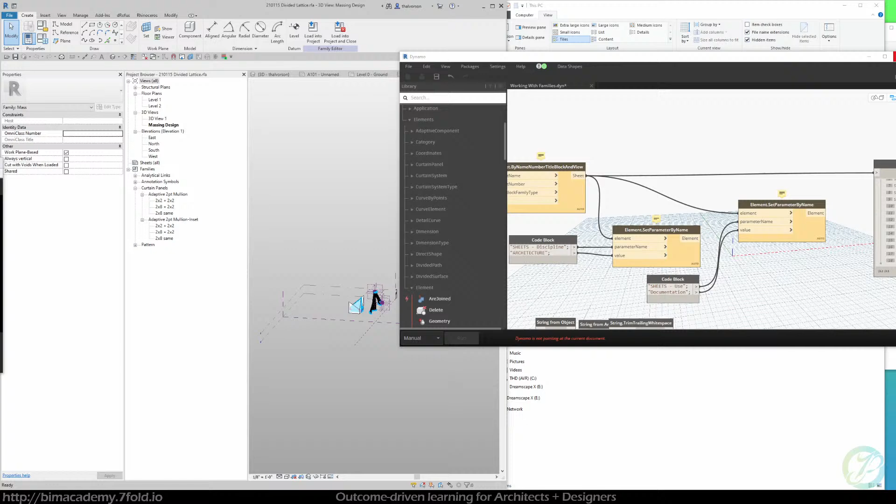Let me close Dynamo for a second and just focus on the Revit environment. So what do we got here?

I have a new massing environment family, and if you haven't done this already, it's just under File, New, Family right here. Let me just pull up the chat window so I'm not missing anybody here.

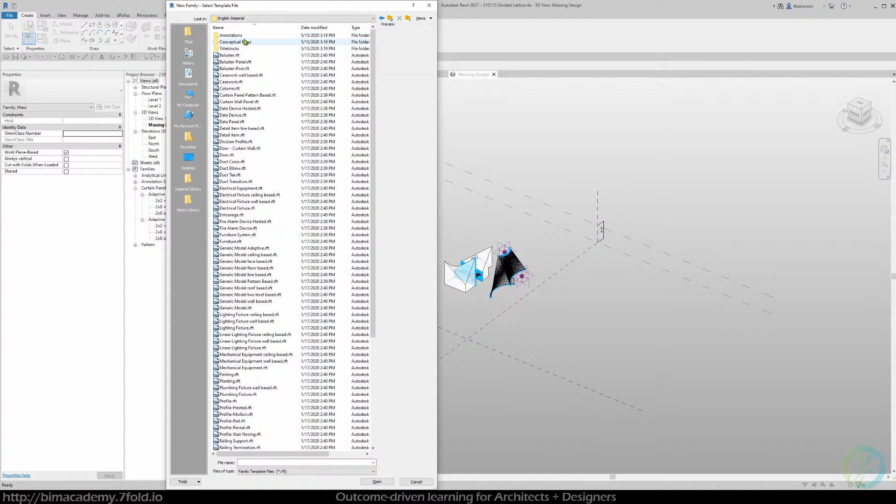So if you haven't already done this, go ahead and go to File, New, Conceptual Mass or Family, and then navigate to your template. I'm going to sort by name, go to Conceptual Mass, and mass.rft, and hit open. That'll give you the environment that we're looking at here.

Just to give you a quick overview of what we're going to cover: basically I have a couple points here that are driving these repeater components, and we actually have an adaptive 2-point component here. If we take that and drag this up or change the offset relative to the level, then that's going to adapt as you go.

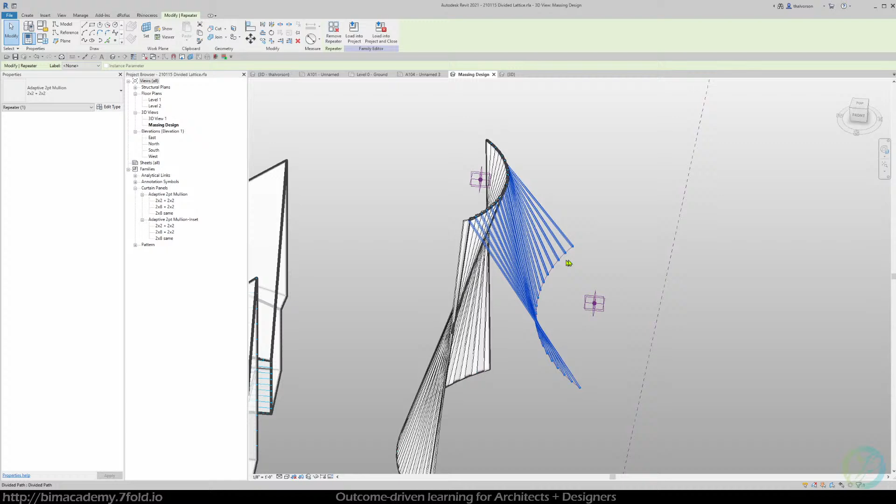So if I just Control Z to undo that - one cool thing I'll show you how to do with this adaptive component is you can change out the type. This is controlling the profile size on this side as well as the upper side there, and we can control it parametrically. Then as we move these points around, the host line here, we can adapt that dynamically, and the entire system is going to adapt with us.

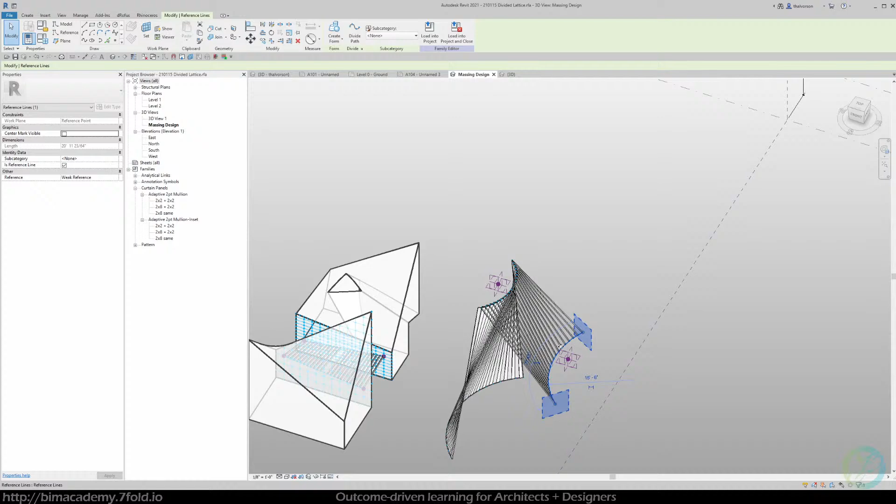So this is completely out of the box Revit. There's no Grasshopper, no Dynamo required to do this workflow. And this same component that's doing this type of framing system here, we can reuse that on a lattice type structure that is adapting to 2 different surfaces, and we can even load that into our project environment and use it there. So tons of flexibility here.

If we do have time at the end, the Dynamo workflow I mentioned, I'll basically just be showing the bread and butter of Dynamo. So if you haven't touched it before, this is the first time you're getting into it - basically how to generate views and sheets automatically if you don't have other add-ins such as Ideate software or any proprietary software you've made yourself, or pyRevit. You can use Dynamo to spin up your own tools and then automate all the data that's attached to your sheets.

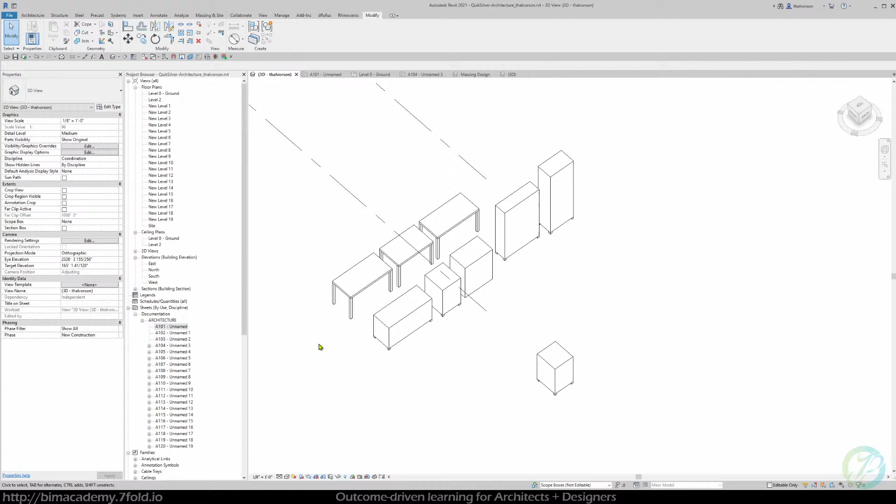So any of the additional instance parameters that you're using to help organize your set, I can show how to do that. Basically, once you get your set organized, there's a bunch of different ways. It opens up the core concepts of how to use Dynamo and making edits to families and anything in the model that you might not be seeing visually - you can see analytically through Dynamo. So we'll take a look at that.

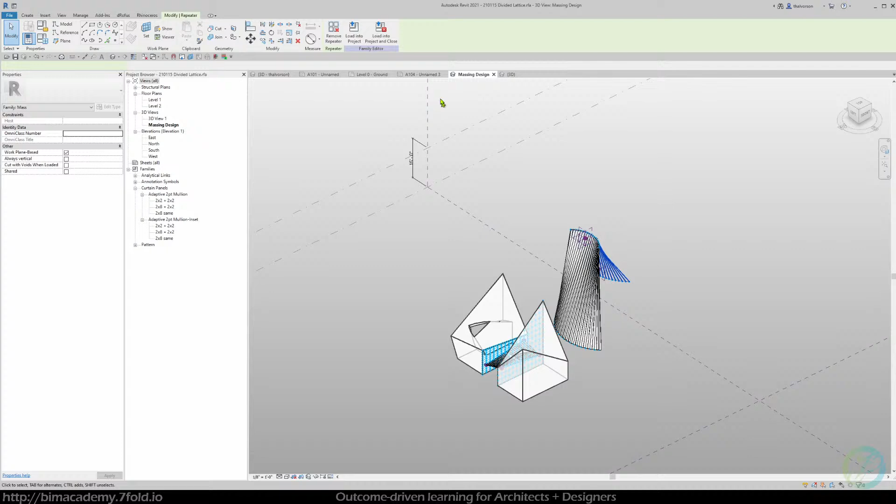But I'm going to go ahead and start with the conceptual massing workflow I talked about. And again, if I just open up that family real quick, let's tab in here, do that family, take a little bit closer look. It's just a pretty standard 2-point adaptive component, and we'll build this up from scratch if you follow along. So let's go ahead and do that.

So if you're in your new massing environment mode, you can do a bunch of different things to model. If you go to the Create tab, go to Model and Rectangle, just be mindful of these 2 things here - drawing on face. I typically always hit Draw on Work Plane, and then I'm being mindful of this green ribbon that's opened up here. I'm just going to keep it on Level 1, but I could pick any different surface I want - I'm going to keep it at Level 1 here.

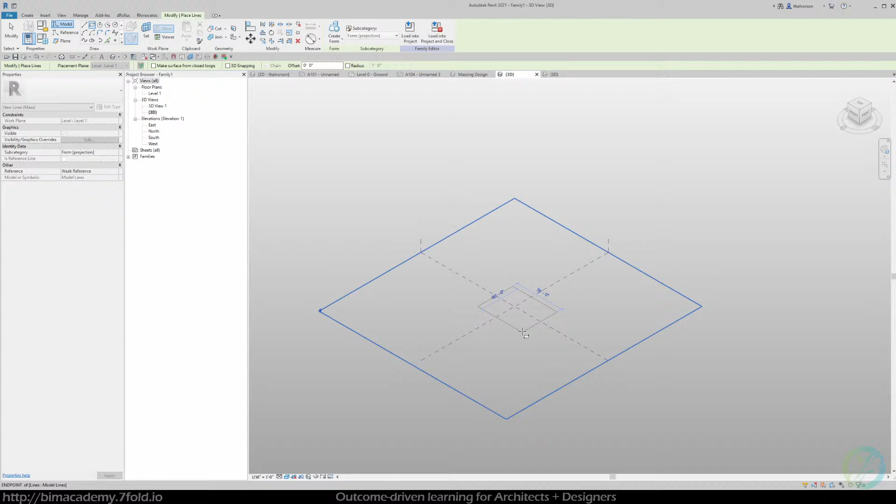And then just draw that shape. Now I can start to size this if I want, but I'm just going to keep it simple and hit Create Form. I'm going to extrude that line. Then I have access to all the edges, the points, anything in here that I want, so I can select those points and start to manipulate them.

Now, if you wanted to start to sculpt things a bit more, you could - there's a bunch of different ways to do it, but I typically will do different shapes with like a reference and set those reference planes.

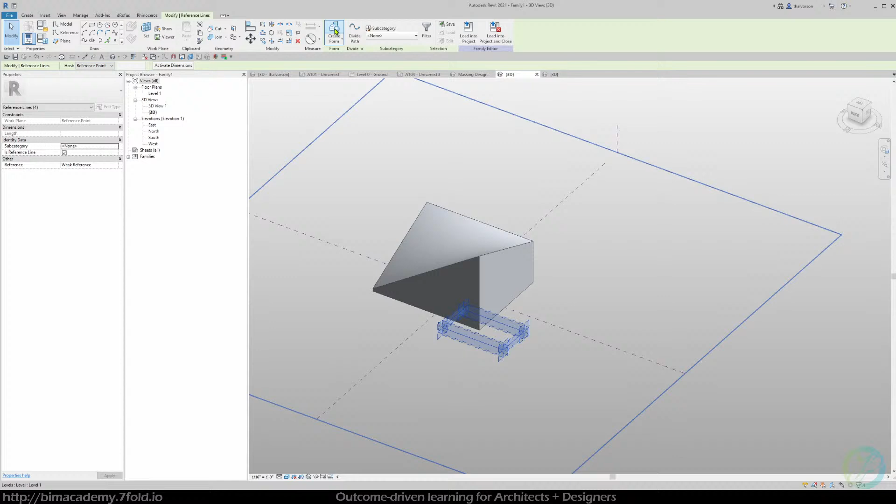And then when I create form at this point, now I have the option to do a surface or an extrusion. And the reason I did that is because if I turn this into, instead of a solid, I turn this into a void. Now it's on the wrong level, but I anticipated it to be cutting away from that.

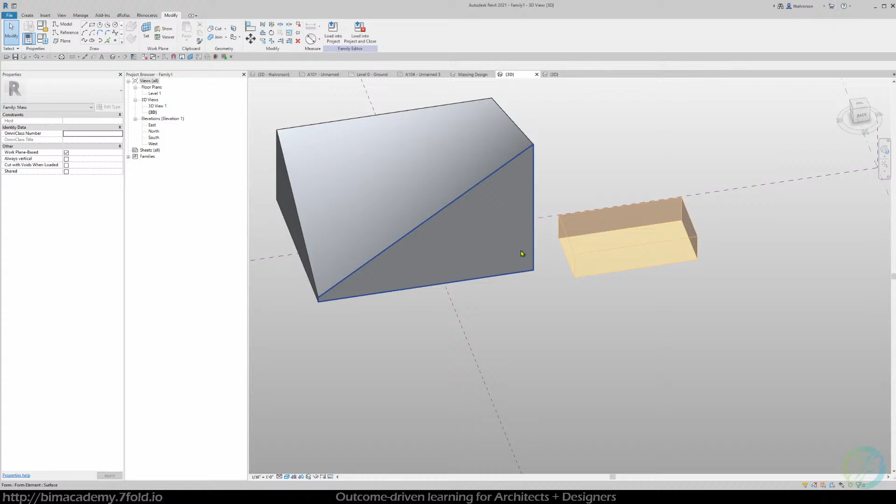So if I screwed up my hosting relationships, I can just select those reference lines. I can see right here the host is set to reference point, and I can just change that to level 1. So I just brought that down there, and now I can just drag that into position. And if it's not cutting right away, just go up here to cut and say, cut this from that. And voila, there it's booleaning away.

That's a tongue twister. And if I just tab, I can start to manipulate this extrusion without needing to tab all the way into the underlying void form. So that's kind of a nice way to visualize it.

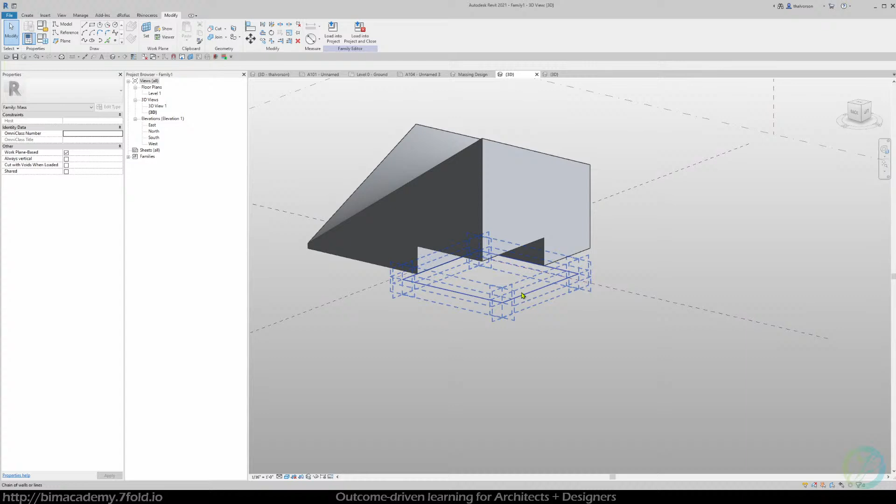You can also do 2 sets of these. So if you want to do a taper, I'm not going to go too deep on all that type of stuff, but there's a lot of good ways.

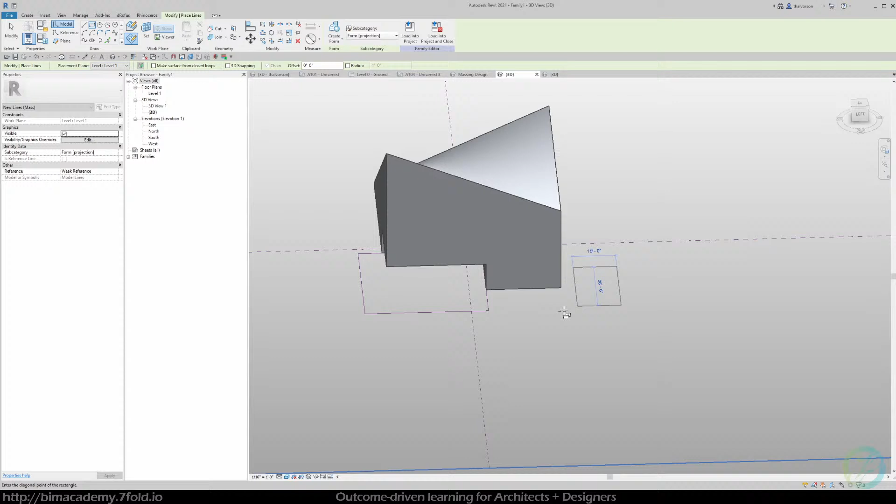If you wanted to do it more flexibly, you could do a model rectangle like we did before, and then instead of reference lines, we can set that to level 1, and then just drag that into place. And if I extrude that, that gives me that flexibility with the points and the edges.

This one, you're not going to have that point flexibility. So let me just go back to making this a little bit more translucent and tab into that point there. And I get generally what I want to do, and just tab selecting that. Now, if I get pretty close to what I want, that's okay.

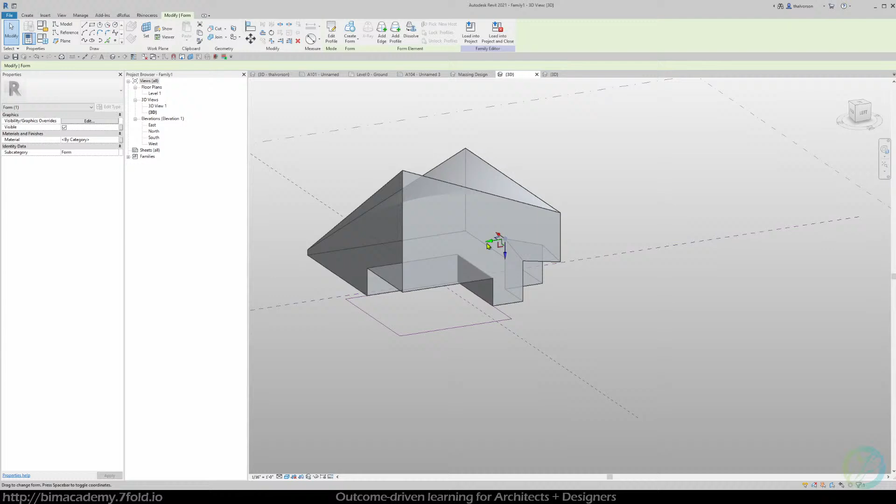And now I can just change that again to a void, and it's going to cut away from there. Now, if I need to get back to the geometry, it takes a little bit more effort to tab in, but Revit does a pretty good job of guessing what I want to do here, and I can start to manipulate the cutaway form. So feel free to explore how you want to use that.

Okay, so now that we have our form, I'm just going to, for simplicity, for this demonstration, take this and go up here to mirror, which apparently is unavailable to me. Let's see if I can do it this way. Yep, so if I have everything selected, I can just mirror, draw axis, and do it like that.

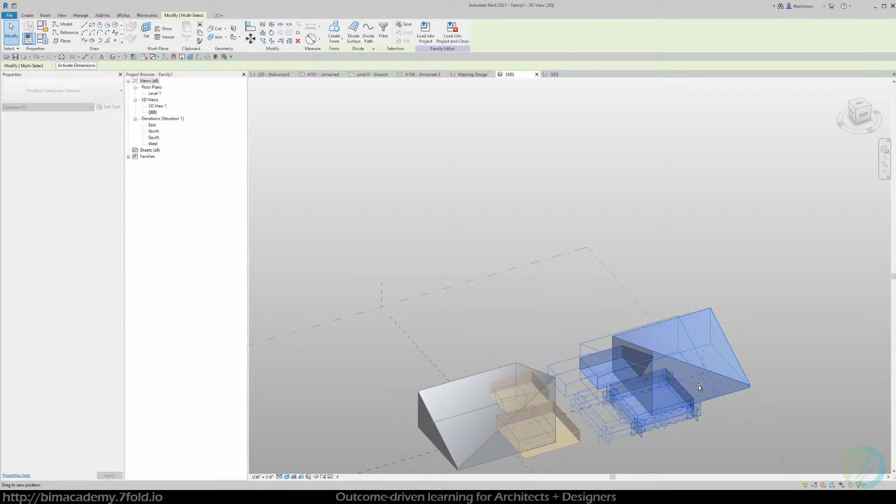Okay, and I'm just going to get these closer, and I'm setting up that workflow we had just prior. So now if I go ahead and do cut once again, I'm going to cut this void from that. Now that's back in there as I wanted. And I'm going to go ahead and just put this back to not be transparent. Yep.

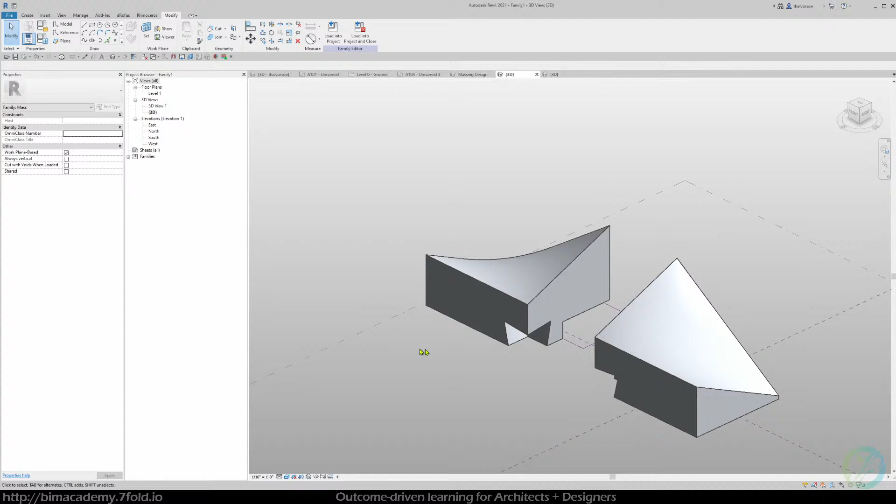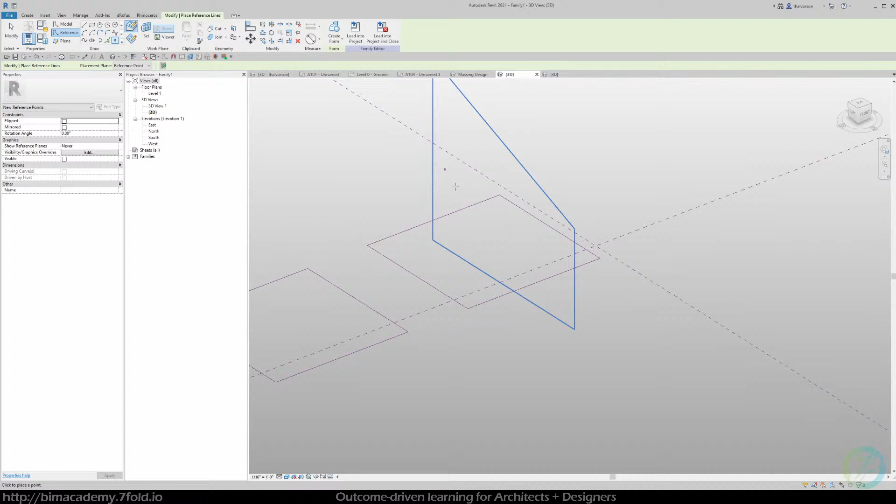All right, so we got our form. And now, if I just go up to reference point and say draw on face, I can go ahead and do that directly on this face here. I'm going to do 2 points there, as well as 2 points over here. Okay, and then select those points. And I know it's hosted properly because it's kind of partially embedded right there.

But I'm going to go ahead and control select both of those, come up here to the modify tab and just select spline through points. And the reason we do that is it allows the points to continue to persist even after we are done.

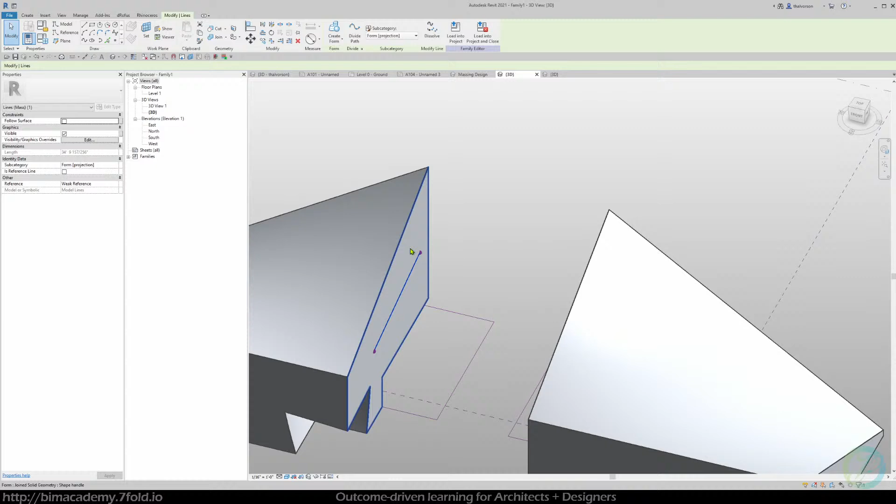Okay, so now that model line is created, I'm going to convert it to a reference line. And I know that because of the planes that are there. And there's benefits to this. We'll talk more about it in a future video.

But I'm going to repeat that process on the other side here and just do spline through points. Is a reference point there. And then if I wanted to, I could loft these together by just selecting both and saying create form. That kind of gives me a visual of what I'm anticipating to work with. But if I just undo that, doing Control Z, I'm actually going to do it a different way. I'm going to select both reference lines and say divide path.

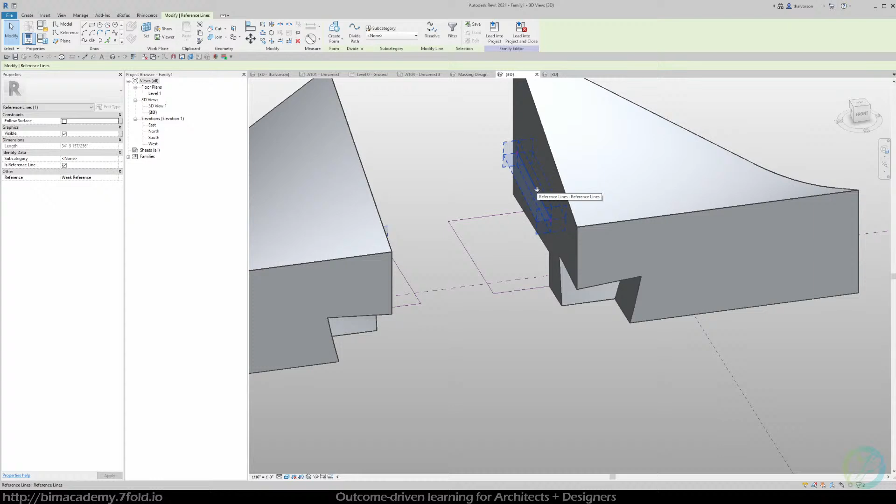Okay, now it's going to give me a bunch of options for this divided path on the side here. With both of them still selected, I'm just going to change this to a higher fixed number.

With them still selected, I'm actually going to hit this radio button to associate to a parameter. I was going to call this number of divisions.

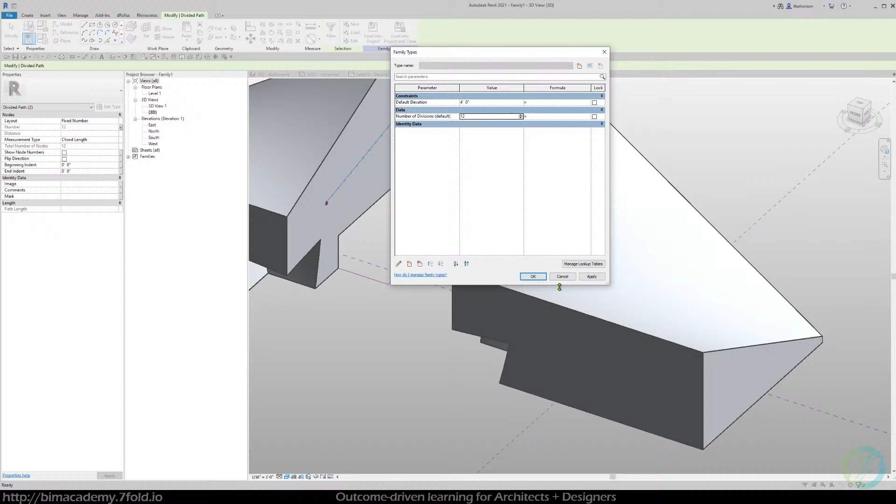So we're just going to do this as data, instance, hit OK, and hit OK. Now if I do need to edit that, it's up here in the family types dialog box, and I can just increment that here. If I loaded this into my project and I need to update that, I could do so without coming back in this environment.

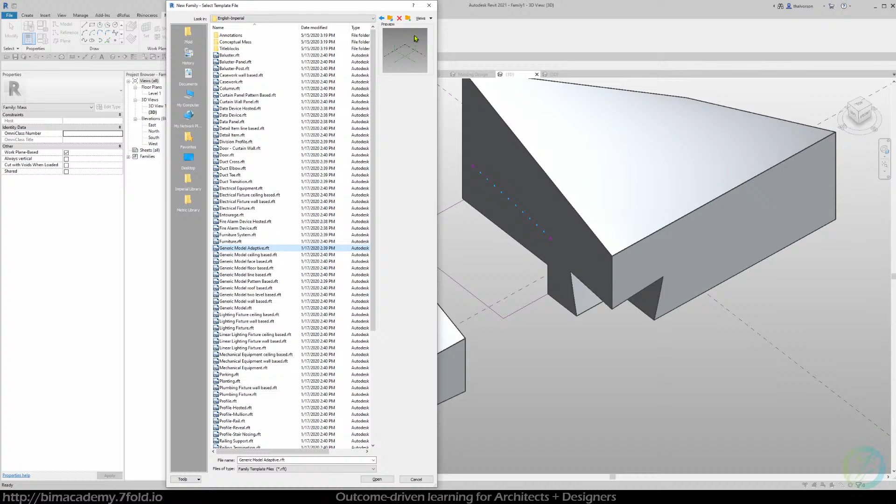For now, we're going to leave that as is. Next, let's go ahead and do File, New, Family. This is going to set up our adaptive component. I'm going to go to my Imperial and come down here to Generic Model Adaptive. This is a completely different environment than any of these other ones.

Just be mindful, it's got that similar gray background, special type of environment just for adaptive components. We're going to pop that open and it looks similar, but there's a lot more relative information like reference level and things along that line. But all we need to do to start is just go to reference point, making sure I'm picking that on the work plane being the reference level, and I can just drop two points on.

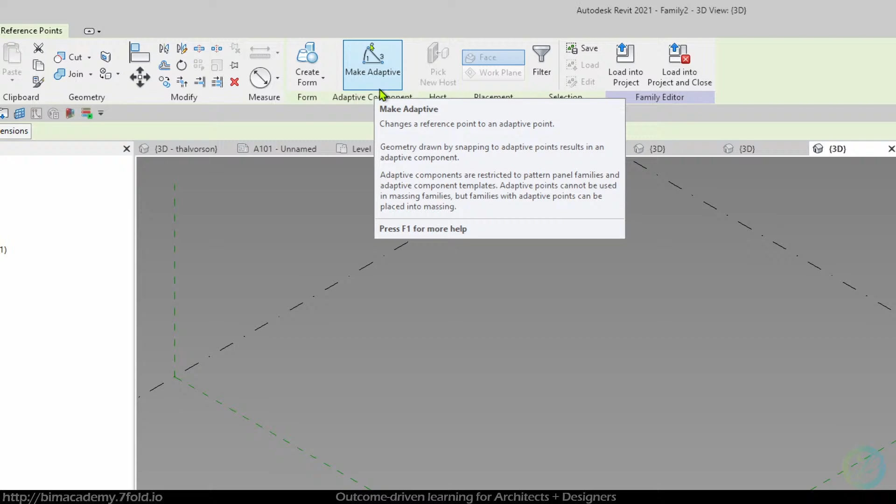Now, the big thing here is when I select these, I have the ability to make them adaptive. Zoom in there, adaptive. That is going to allow me to control the order that these points get placed when I load it into another family or into my project. So I'm going to go ahead and hit Make Adaptive.

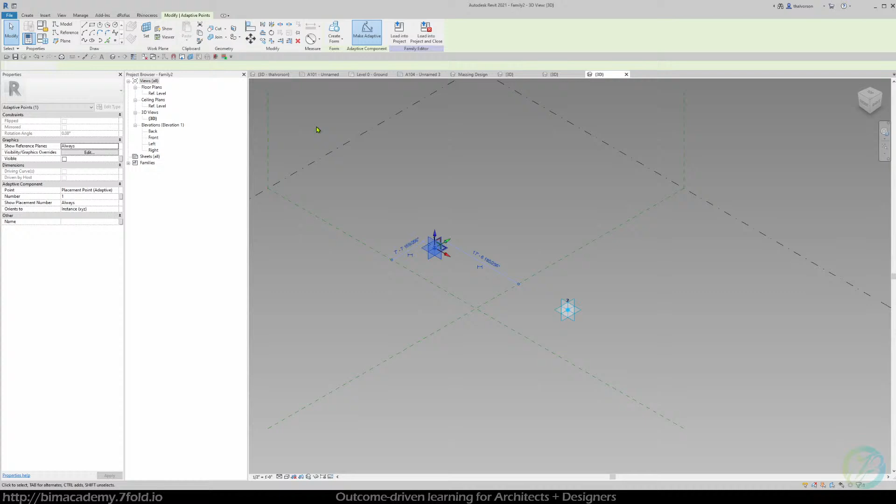Right away we see something happen. There's a little 1 and a 2 over each of these points. So now if I wanted to, I have some options over here, which we'll go over a little bit later, but the simplest way to get this going is just to select both of these holding Control, and again, do our favorite spline through points. That keeps that parametric relationship we want.

I'm going to go ahead and make that a reference line as well, and now it's got those planes. If I wanted to keep it even simpler, I could just leave it as a model line to visualize what's going to happen. But we'll make it more dynamic in a second.

So if I just save that and give it a name, I typically give these a prefix, and I'll just say this is demo for the demonstration, but I just say adaptive from generic to specific. So I've got adaptive 2-point mullion, and then I've got this inset, typically what I do.

And if you wanted to group it, you can also change the category. So if I know that I want to use this as like a mullion type application, I might change it out of generic models into something like curtain panels or columns or something else. And that'll give me some additional control when we load it.

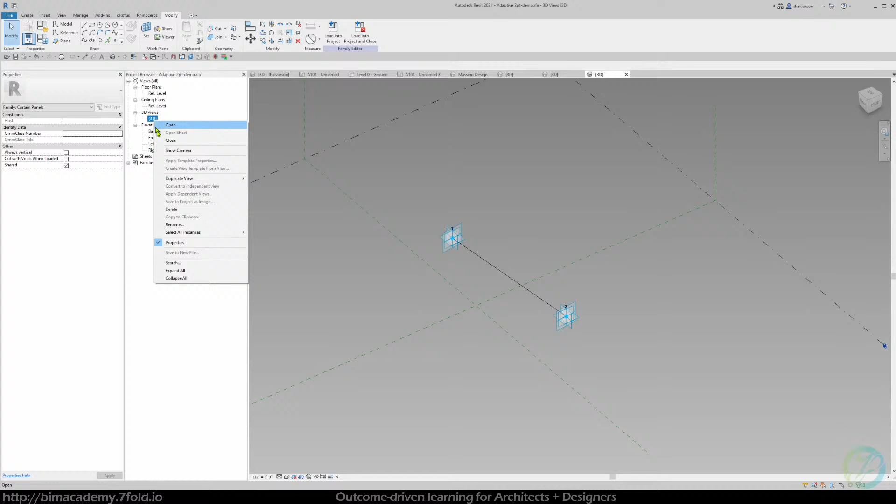Okay, we'll go ahead and save that. Always save down before you load into your projects. I'm going to go ahead and load that. And if I wanted to remember, I'm getting a bunch of 3D tabs up here and I want to just stay organized, I could also just rename this.

I could just say adaptive 2-point demo, and the reason I rename it there is because that's going to name the tab differently. So go ahead and load that up into my new family. That's our new generic mass, which we forgot to save. Let's go ahead and just click and hit escape for now.

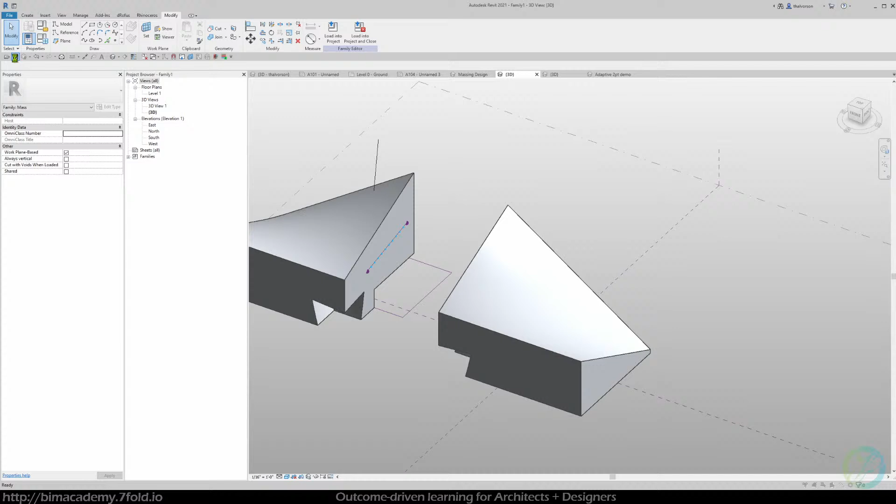So before we forget, let's go ahead and hit save. We're going to drop this into our project folder, and I'm just going to do this here, demo.

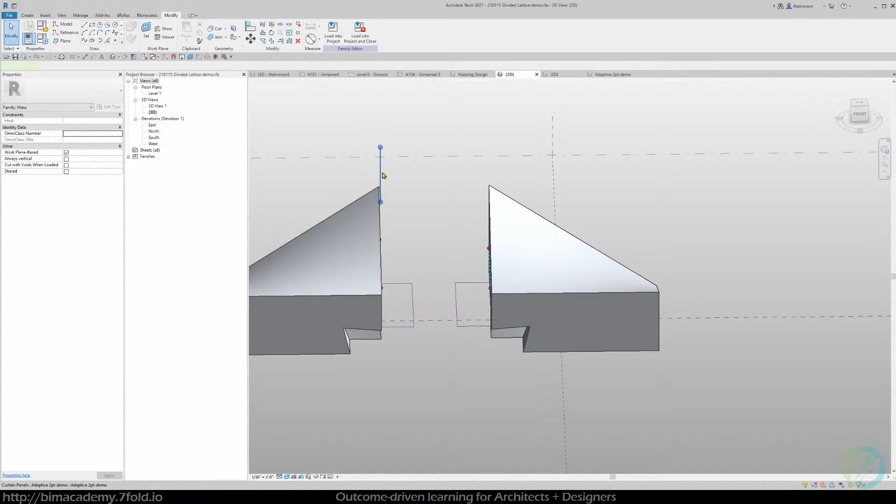All right, so if I wanted to get a preview of what this looks like, I can just right click and say create similar. Yep, there we go. Go to the point there, and you'll notice by that circle with the little X through it, you've got the points selected.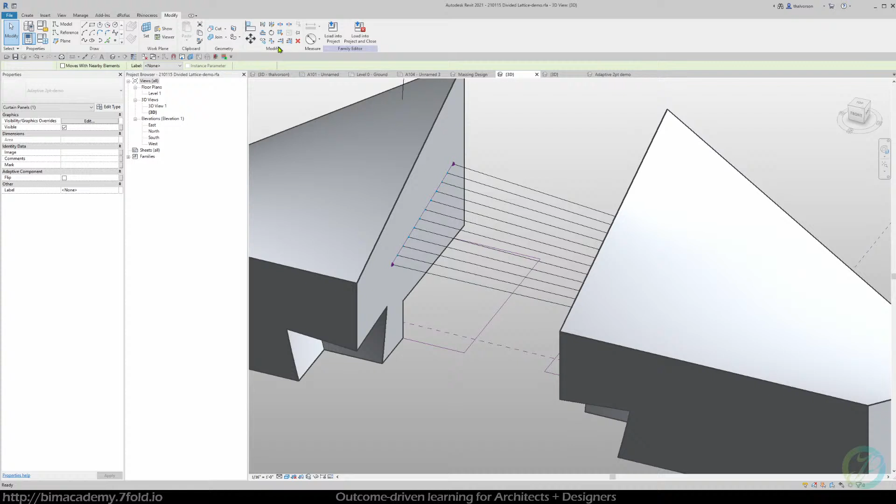And I should be able to snap it onto those points. Okay. And now if we select it, here's the magic: we can select that, come up here, and this option, it's a special type of array that's only available for divided surfaces and divided paths.

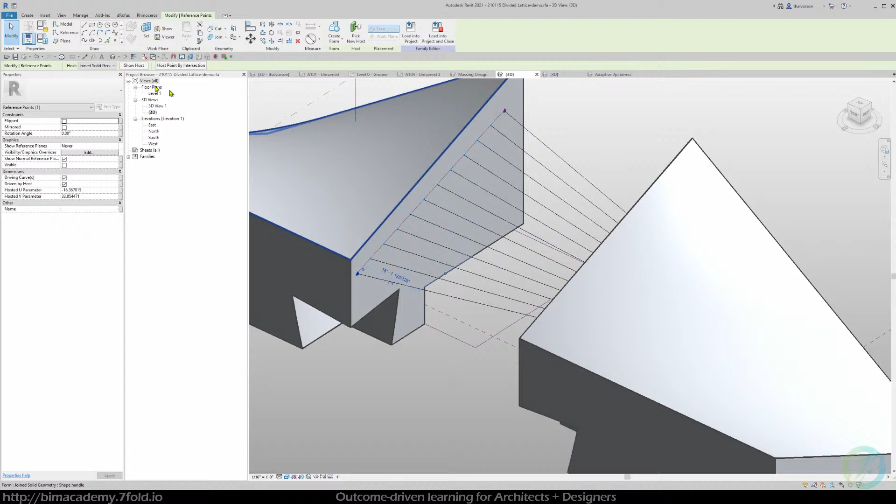So if you select that, it's going to propagate those adaptive components across that divided path or surface. So now if I select my nested point here, which is hosted on my surface, and I start to move that around, you can see that my entire custom lattice is flexing along with it. And if I wanted to start to change how many divisions I have, I could just increment that here, apply, and boom, that's going to propagate.

All right, so that's the basic framework, but we're going to look at the details of it. So to get that custom profile, let me refer to it again. We've got one profile on one side, sweeping to another profile on the other side. Let me just isolate down to this for a second.

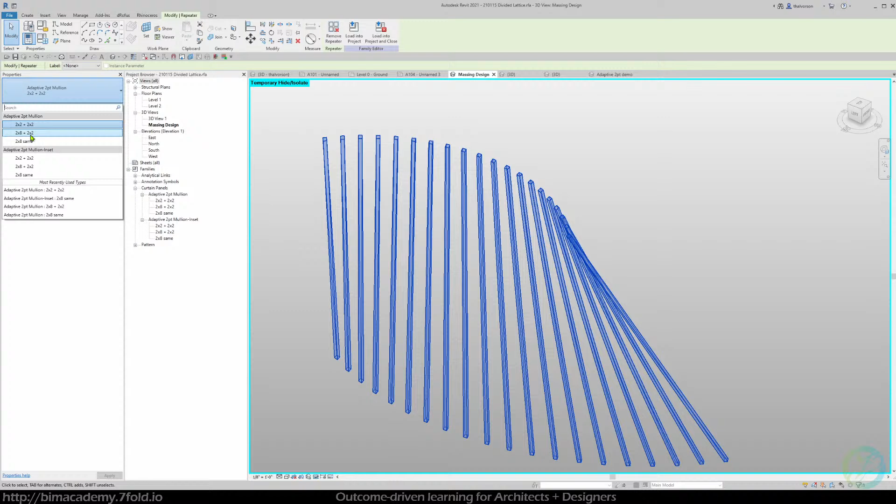And again, if I just change that, I've got this family adaptive 2-point mullion, 2x2 plus 2x2. That's just my naming convention for a 2x2 profile and a 2x2 profile that I can change for other types I've loaded up. And you can see it'll instantly propagate to a different sweep there.

So if I want to do that for this project, the first thing we need to do is actually load that profile family into this environment.

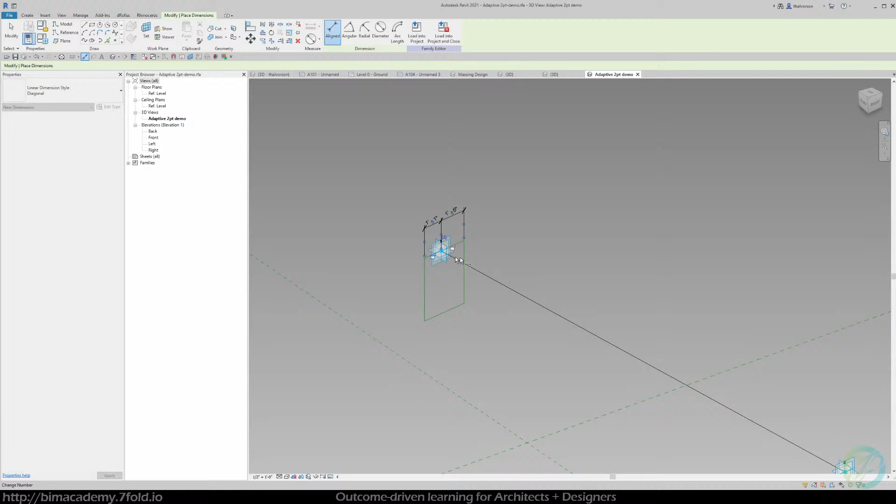So I know it feels like we're going into the matrix a little bit, but the alternative to this method I'm about to show you is we'd actually have to get in here and say reference a rectangle, draw it on the work plane and set the work plane we want, draw it and tab in and move this, and then create some dimensions and just hope that it doesn't break. And then we'd have to repeat that process over here. It's possible, it's just less stable than the method I'm about to show you.

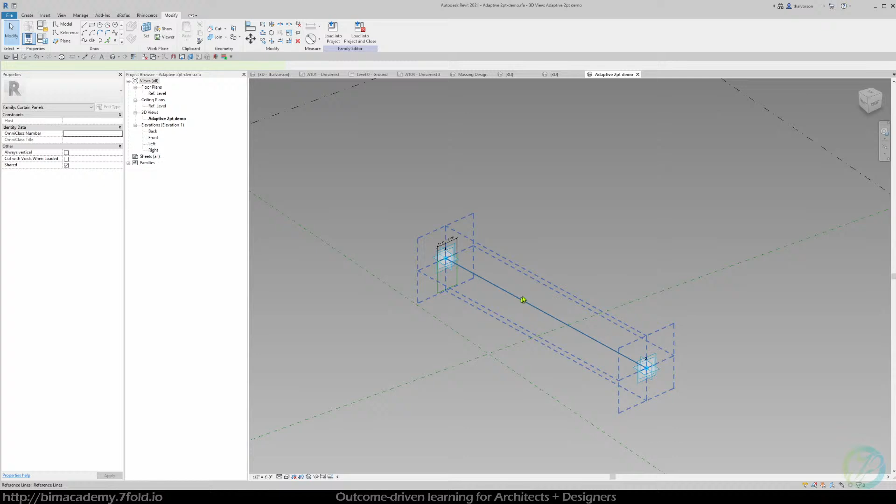So if you're just getting going, that is a way to go, where you can take this profile, take this line here and make it a reference, then repeat that over here, select all of them and create form, and you're good to go. But this method I'm about to show you is way more stable.

So stick with me. So now if we just go to create one more nested family, which is our profile curve, what I'm going to do is go to File, New Family. And once again, come down here.

Now you might be tempted to come over here to profile.rft. This is intended — let me just zoom in on that real quick. So profile.rft, that is a dedicated annotation-based family template and cannot be loaded into the massing or adaptive component environment.

So what you're going to need to do instead is go back to this generic model face-based, and that's going to be loadable in this family, and we'll treat it similar to a profile, but it has to be built upon this template. So let's dive back in and load up generic model face-based.

All right, so this environment is pretty much just a flat face that I host to, and you can just envision this as your profile. So this is the insertion point. Basically going in the Z direction relative to my mouse going in and out, that's the line that I'm going to sweep along.

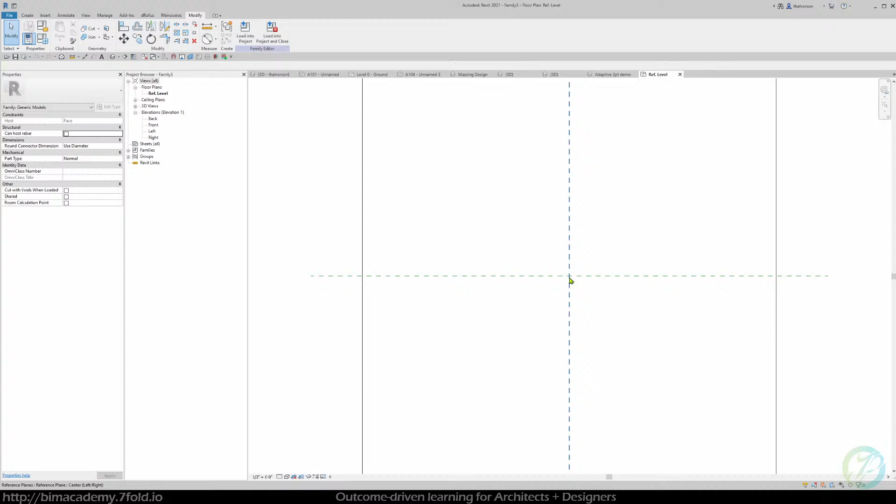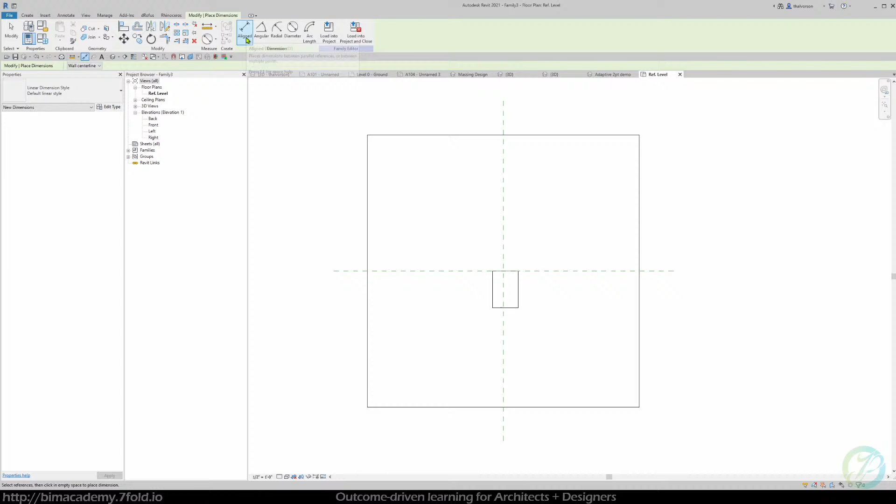Okay, so if I just simply go to create model line and do a rectangle, and just go like this. And then I'm going to go ahead and hit DI for an aligned dimension and just set this to anchor along the center reference plane and hit equals, and then create one more dimension.

That's going to be my parametric dimension. Selecting that dimension, going up here to label and hitting that to create one, I'm going to make it a family parameter, that's fine. I'm just going to call this profile width and make it a type. And if this is a little bit too big, I can just change the scale real quick down to something a little smaller.

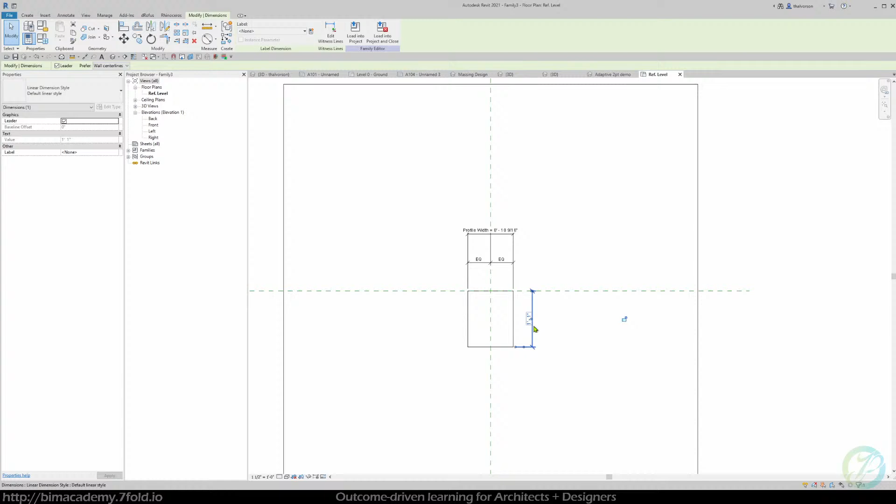And one more time, I can just hit DI, and it's going to give me a line dimension. I typically go off of reference planes whenever possible, so I'll just link that to the end of my profile. Select that dimension, hit create a parameter, and now I'm just going to call this profile depth.

And now I'm just going to control this over here in my types dialog. So if I want to do this a little bit more precisely, I could change up my units. I'm working in feet and inches. You might be in millimeters, that's okay. I'm just going to change this to fractional inches and hit OK and hit OK. Now it'll be a little bit easier for me to make some edits.

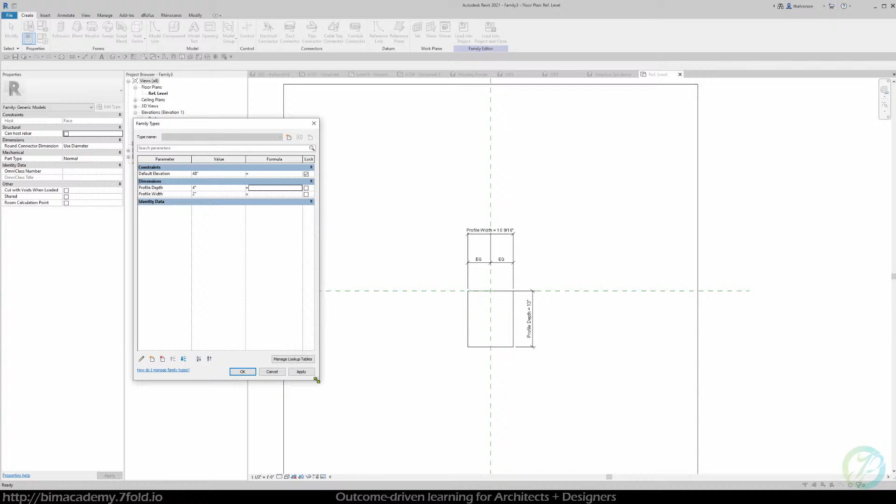So I'm just going to change this to a nominal 2x4. And again, this isn't construction tolerances, this is just kind of a nominal basic size for simplicity. I'm not going to go into detail about that, but you can tighten this up as much as you want. And I'm going to create a new type by just saying new and calling this 2x4.

All right, and then I might as well create a couple more types while I'm at it. So let's call the next one 2x2, just changing that to 2, leaving the 2 width, hitting apply, seeing that change there. And then might as well make one more. We could do like a 1x10 if you want. The width is 1, the depth is 10.

And we can do a separate video or training on how to automate creating types parametrically through Dynamo if you're interested. Feel free to leave a comment if that's something you might want to learn next time. But for now, I'm just going to stick to these 3 types and hit OK.

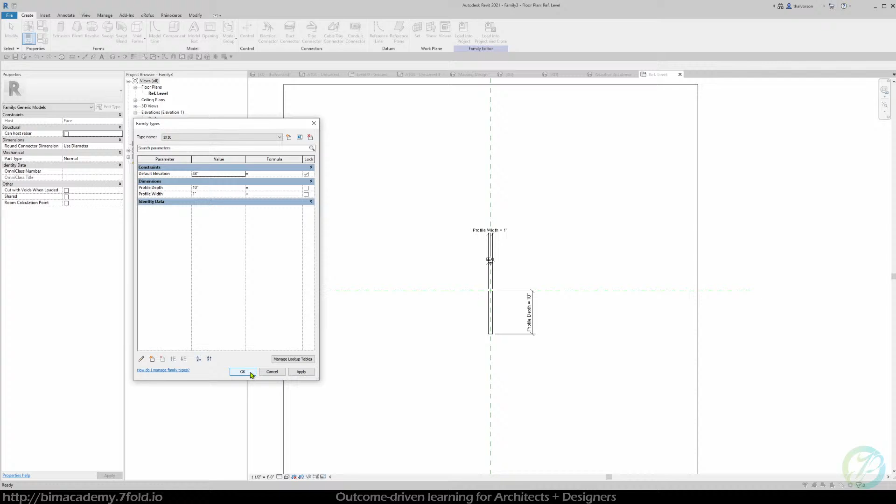One final thing to keep in mind is the category once again. It's under generic model. We'll leave that for now, but you can always change this to profile. And I'll explain why that's important in a second.

So let's go ahead and save that down to our project folder. I've got my other one there. I'm just going to call it, for consistency, profile. And this is intended specifically to be loaded inside adaptives so I don't confuse myself with other profiles. So profile adaptive, and I'll just call it rectangle-demo. Cool, so go ahead and save that.

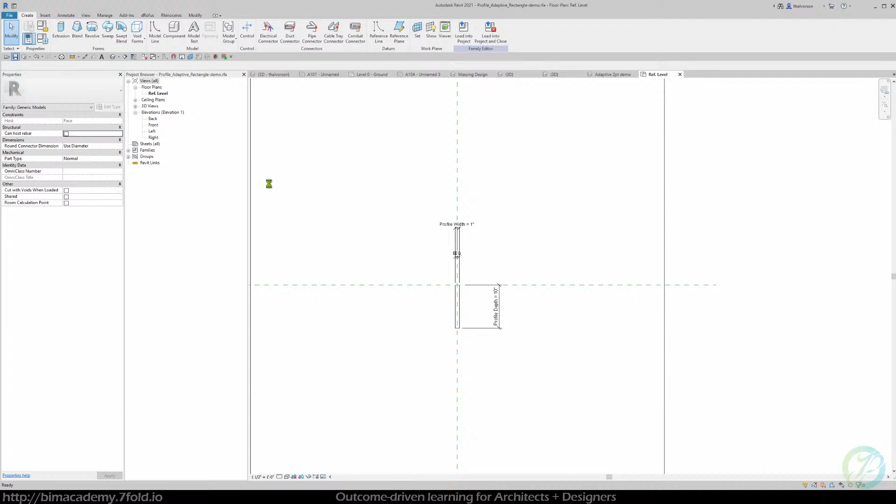And let's see if any. All right, awesome. So if you're tracking along, what we want to do now is we got that saved down, and I'm going to go ahead and load this up into my 2-point demo adaptive component.

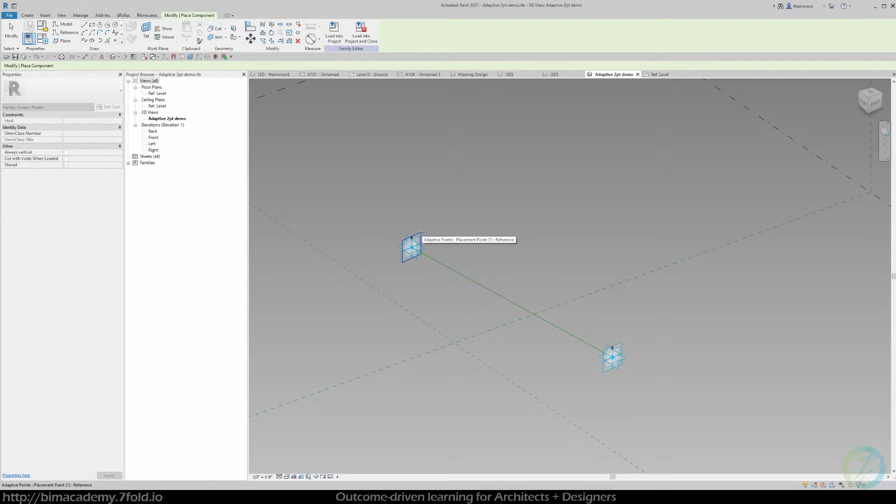All right, so this is where the magic happens. We get this option here to place on face or place on a work plane. I want to go ahead and say work plane, and then I want to come here to the green context menu and say pick. There's a bunch of planes here, but I want the one that's the biggest outside of my adaptive point. That's going to be the normal plane to the other side here. So I'll explain in a second.

So if I pick that and then I zoom in and I just pick it right there. Now, as I move this point, move this up here - that's fine, don't worry about that warning right now. I can start to move this, and the biggest thing I want to show is that normal plane. You can see how it's facing the other point in the line. My profile is now hosted on that, and it's rotating and twisting according to where that is.

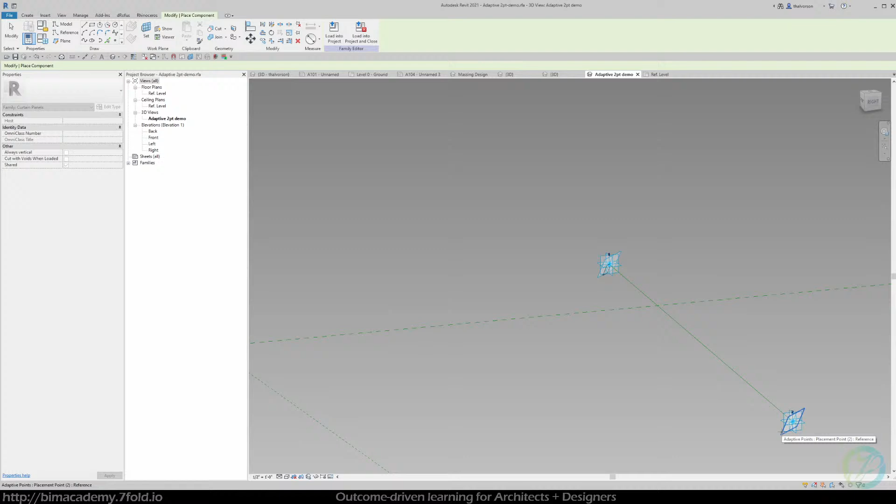So now all I need to do is just repeat that process by just tabbing in. I can right click and say create similar. Once again, say place on work plane. Come over here to placement plane and say pick. And then I can just pick that normal plane right there and pick those crosshairs.

So if you missed that, let's see if I can zoom in here - it's a little hard to see, but basically this outer plane here, this one, is the one we've just hosted to on both sides. So these two. And so now as we start to move that around, right, you can see that is actually moving. Pretty cool, see how it's always facing the direction?

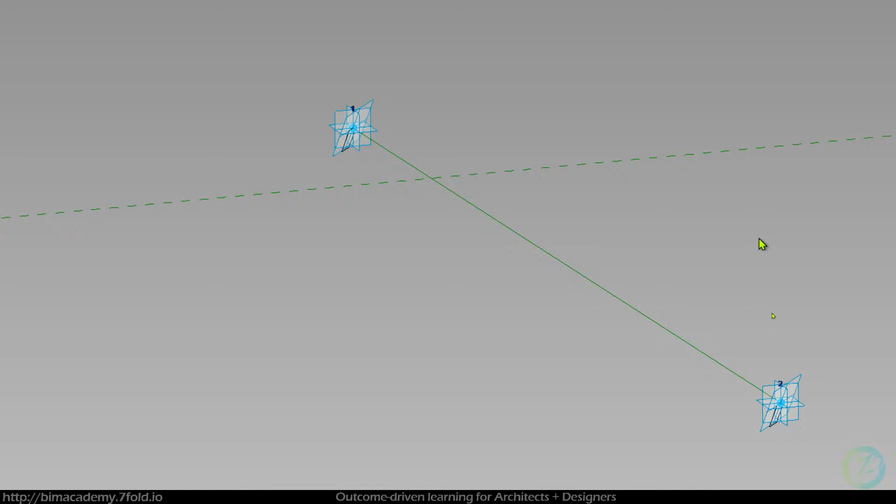All right, so now that we have our parametric relationship set up, all I need to do is just tab in, hit that, and actually wait one more step before we do the sweep - we want to select our profile that we just loaded, like that, and then see this little label here? This allows me to control the type.

Now, you're not going to be able to change it here, but if you come up to the green context menu and label, you can add a parameter right here. And this is true of any family where you have a type loaded as a nested family. Hit add parameter, and I'm going to group this close to my other parameters in my family, so I'm just going to put it under dimensions. And then for the name, I'm just going to call this profile 1 and hit OK. Type is good, hit OK.

So now that label has been assigned there as profile number 1, and it's been set to 2x4.

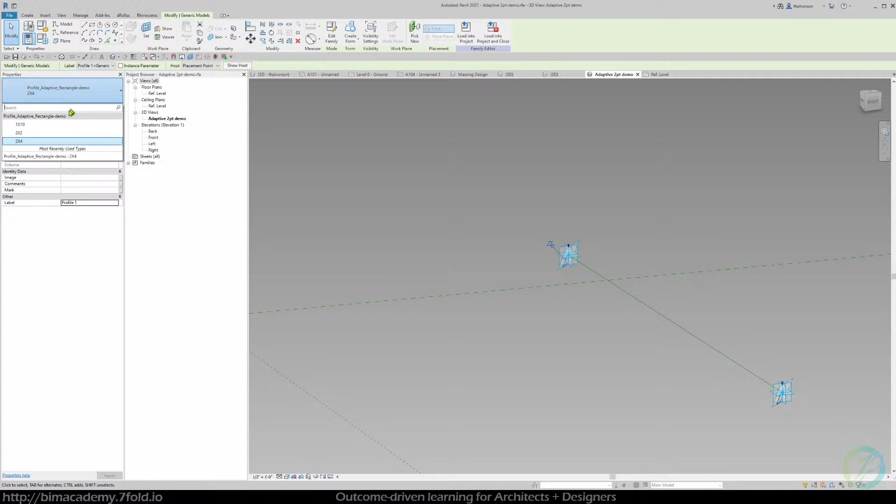I'll explain this more in a second, but if I try to change it directly right here, I'm going to get a warning dialog saying, hey, you just associated this to a parameter. If you change it now, it's going to break the association. So once you get this set up, if you hit X, you can see that association has now been lost.

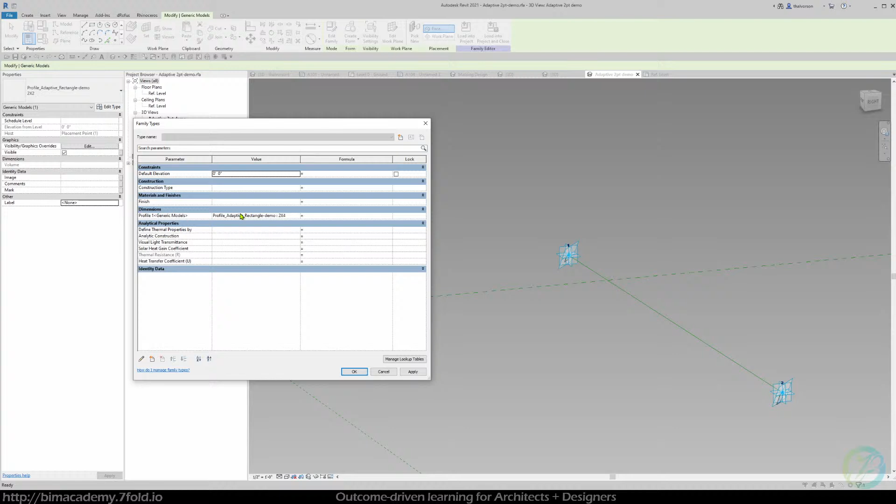I'm electing to control everything through the types dialog box up here. This gives me the control I want when loading it into my project or massing environment. But let's just create that one more time. If I Control Z to undo, that's going to keep that association on profile 1 like I want.

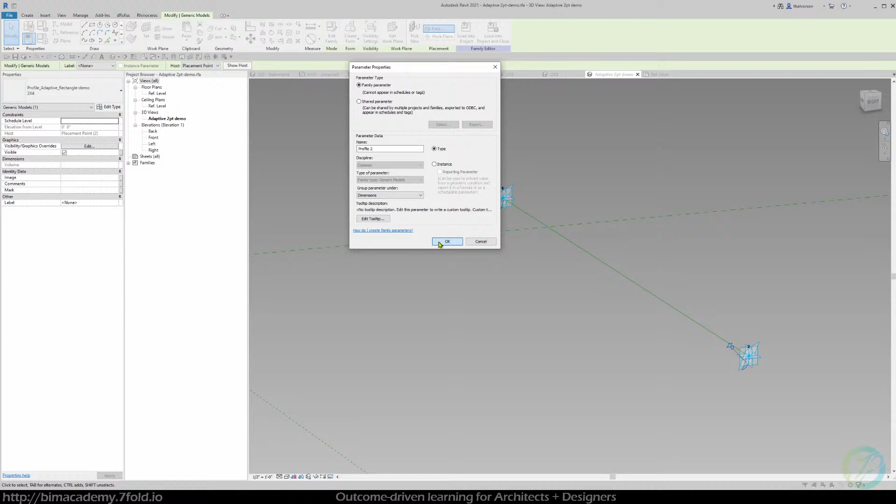And then I'm going to repeat that process for profile number 2. So select that family, go up to label and say add parameter right there, and just call that profile 2. Group it under dimensions, just typing D to jump me up there. And type is OK, I'm not going to worry about tooltips, just keeping it simple for now. All right, and that association has been created.

So now I can take that family and hold Control, pick my reference line, and pick my other—if I'm not holding Control right now, I'm going to tab to get to my other family there, and now hold Control and select it. I've built up my selection, I've got my three things selected, and just go ahead and hit Create Form.

Boom! Now it looks just like another 2x4, but it's a smart 2x4, which is really exciting. All right, let's start to understand why.

Okay, if I go back to the types dialog box, I haven't set any types yet, but let's go ahead and create one. So we've got 2x4 by 2x4. Let's give that a type name—this is just my little shorthand for the first profile and the second profile. You could literally create this as complex as you want, with multiple profiles, but we're just going to keep it to these two profiles for now. So once I hit OK, that's going to instantiate that type and save this information.

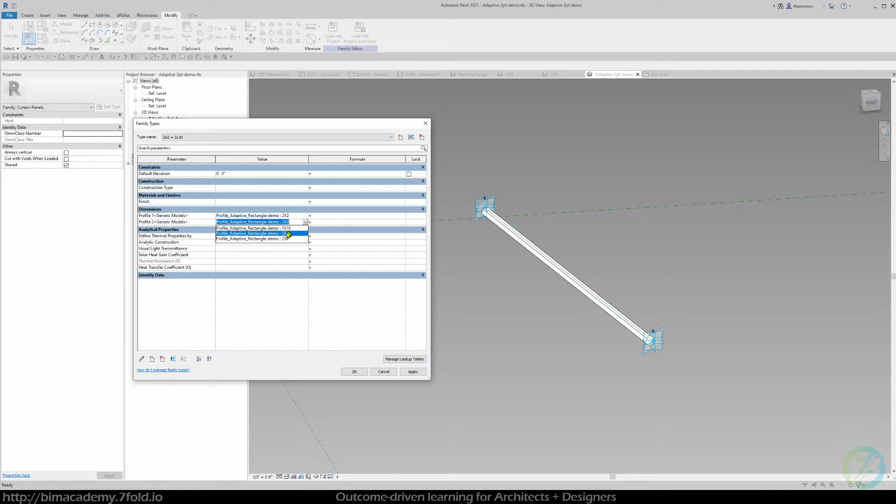So I could continue this process building out different types, like a 2x2 plus the 1x10 I had in there. And now to keep consistent, I'm going to make this 1x10 apply. And now you can see we actually have a parametric taper happening that is super clean, and all those changes are happening inside of a nested component. So I can make all my control happen here, reload that into here, and it's just going to be a lot more stable.

So if I want to get this render ready, I might as well. I could just pick my newly swept geometry and go to material, and I'm going to give it a default material rather than by category. If you don't see this right away, you can twirl it open with this little library dialog box. I've just got the out-of-the-box groups here provided by Revit.

Hey, I know you. Welcome, welcome. Hey, I see you waving at me. What's going on? We are in the middle of Revit, the jungle of Revit. Crazy.

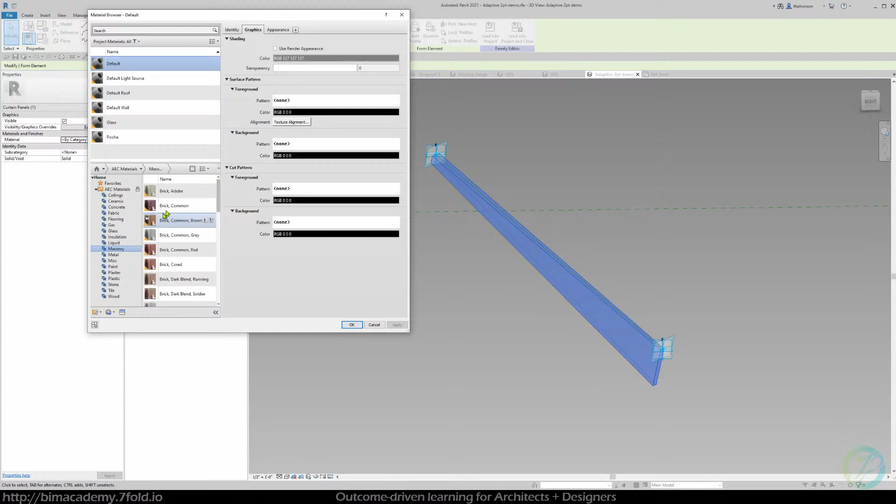So I'm going to assign a default material here and just pick something, pick your favorite material. So some brick, why not? And apply that, hit OK.

All right, so let's see, I do this right. Toggle back.

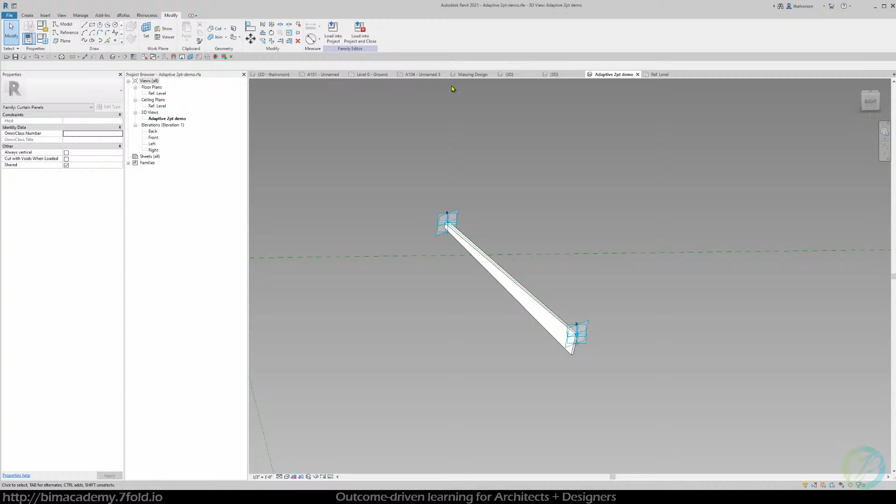If you're just tuning in, we're aiming to produce this parametric model that is highly flexible, highly adaptable, fully parametric. And when we move that around, it is updating on the fly, which is super exciting. But we're making the bones of this component right now.

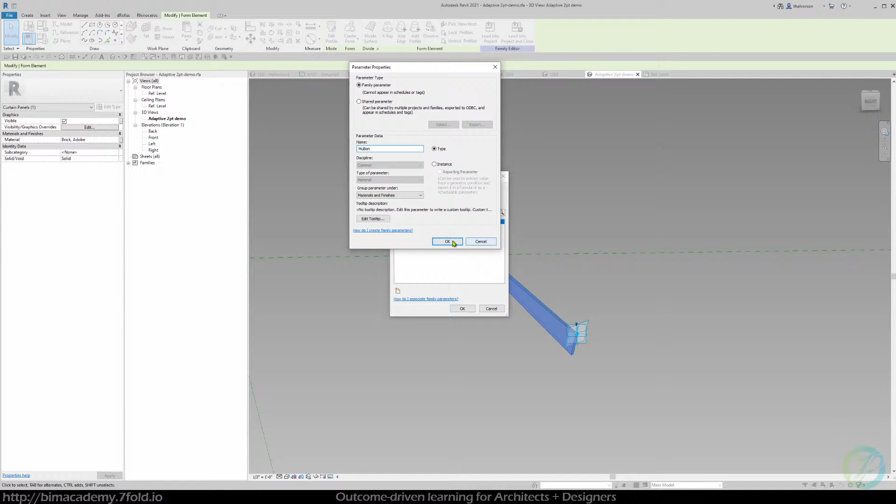So if we dive back in, we've got our material assigned here, we can go ahead and associate that, so we got some control. I typically don't call it material, for a bunch of reasons. I'm just going to call this mullion. And again, I know this isn't a mullion, but we'll just go with it. Hit OK, hit OK. And before I get super excited to load this, remember to save.

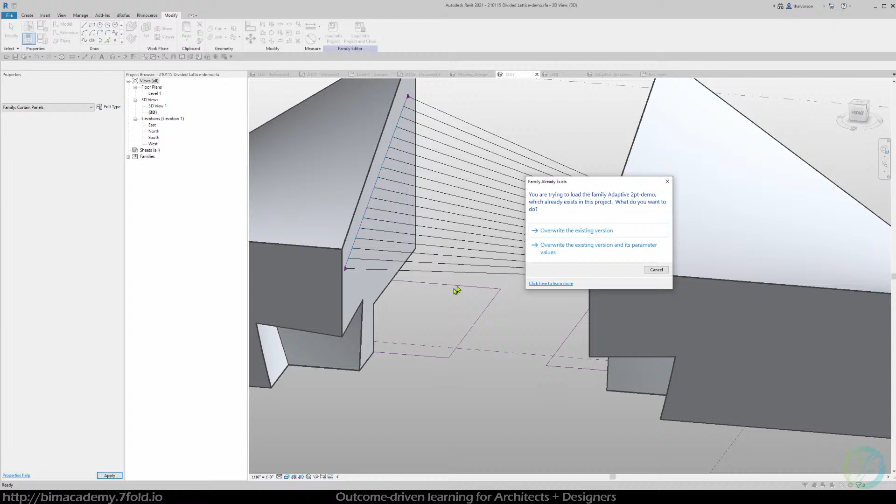Finally, I'm going to load that up into my demo project here, and overwrite existing version and parameter values. Boom, look at that. So what we've got is our repeater component we previously modeled. And get rid of this random one flying in space. Now the exciting part is I can change those out for the types we made in the last step.

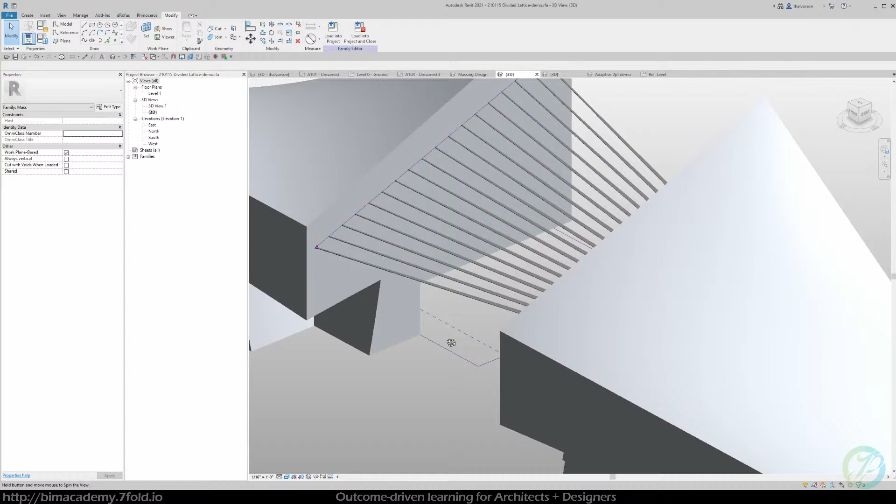So if I go to 2x2, now I can get that 2x2 very quickly, or do the 2x4s, or that 1x10 combination. So it's pretty exciting what you can do here. And we don't have to keep this to just this lattice, we can reuse this time and time again.

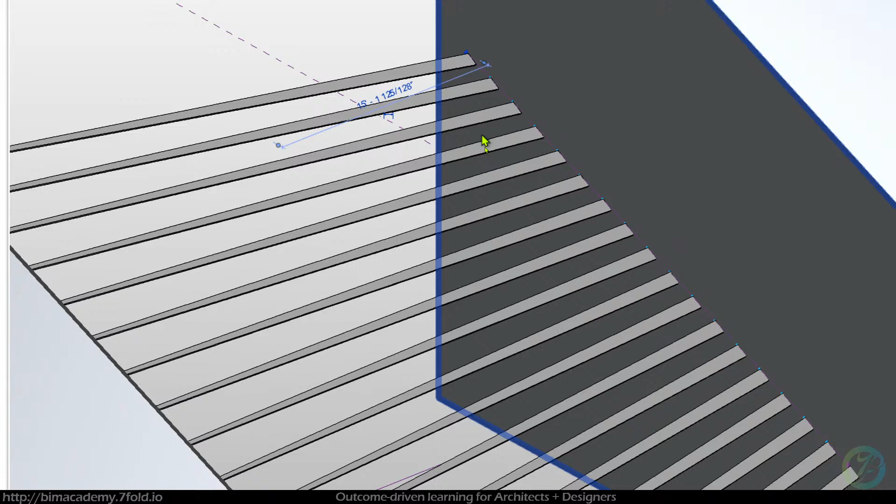So just a demo quick here, I tab in, tab way too much. There's my point. And I'm gonna hover here for one second. You have to keep an eye on, let me zoom in here. You just gotta keep tabbing, right, until you find the point. So look for the fat point, and that's the one you want. That's the anchor point that's driving this whole thing.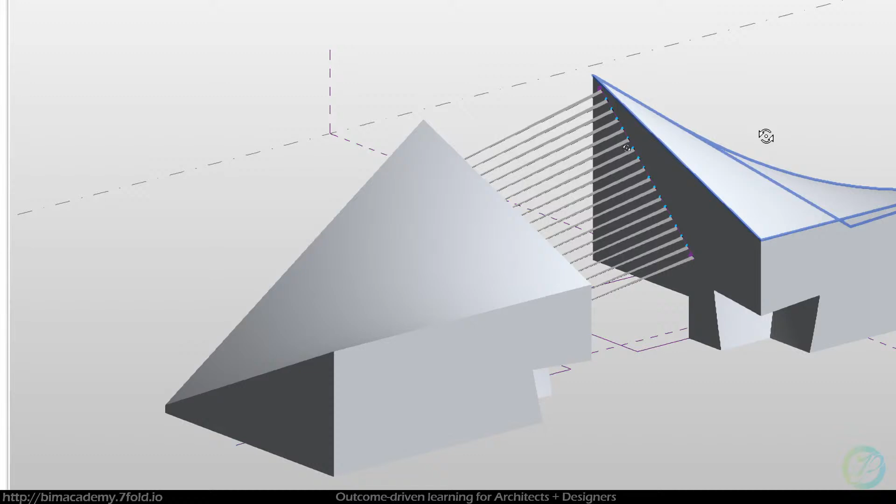So we can continue to manipulate this and start to build this up, but it's pretty much done already. And from here, it's just really what you want to do with it. How complex do you want to make your surfaces? Let me zoom back out here. How complex do you want to make the divided curve? Things like that—it's really completely up to you.

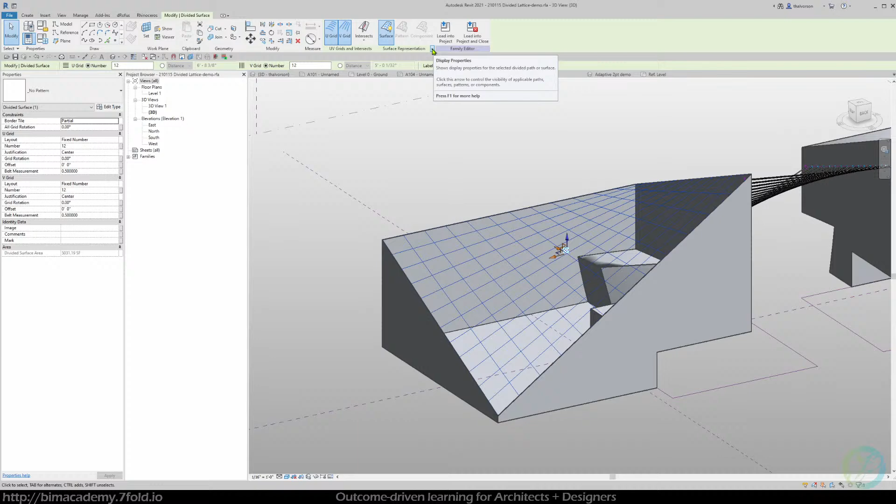So one of the things I like to do as well is, let's just say I want to take the surface and rationalize that. I could take it and divide surface, and this is going to give me a base grid pattern here. Now if I want to use that component I just made, there's a bunch of options here on the left, but I could also open up surface representation here with a little caret and zoom in. It's hard to see, but that little caret right there, that's going to give me options for nodes. When I turn that on, it's going to give me snappable points.

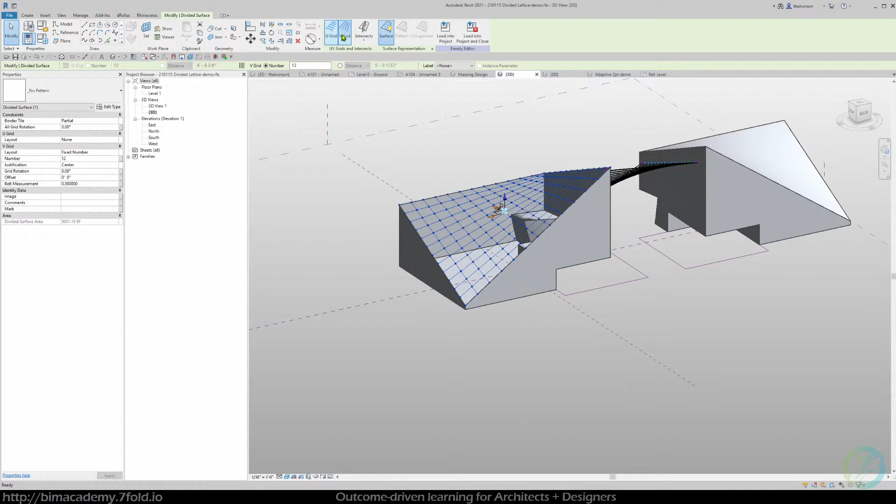Again, a couple ways to do this. I could simplify this to just have one division, so it's only moving in one direction. I could also just turn off the U and V grids, so I only have one of those showing at the same time. So I'm gonna go ahead and just keep one of those showing.

And then I'm gonna go back to my family, and here's my curtain panels, and I'm just gonna drag this onto the canvas and just go find those points that are now snappable. Again, just make sure if you're having a tough time snapping the correct thing, you can always use the glasses and isolate down to just that surface, drag it in, and then pick the points that you want right here.

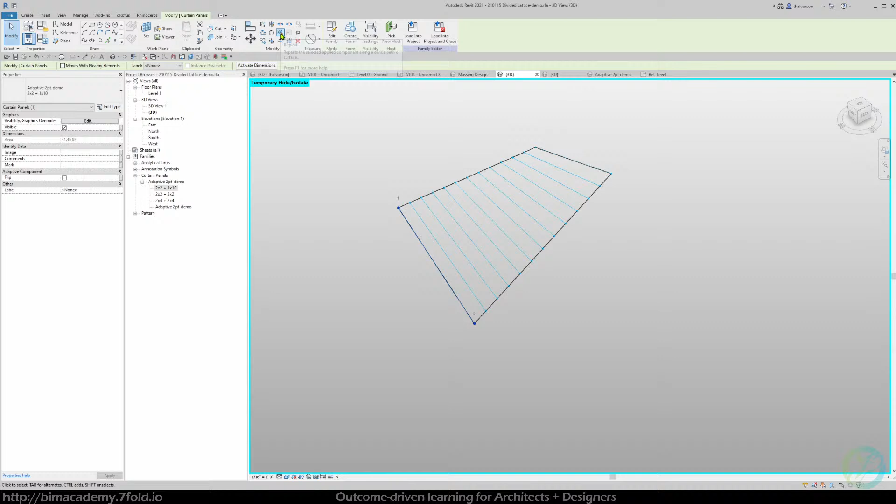All right, so now I only need to do it once, because our favorite button in the world, I get to repeat that, and it's instantly going to propagate itself across my whole surface. So now I'm getting a lot more complex geometry that's starting to look like a framing system. And again, I can parametrically control what types of profiles I'm using. So pretty exciting stuff. And then if I wanted to make this more rational, I could change this from fixed numbers to fixed distance and make that a more nominal size.

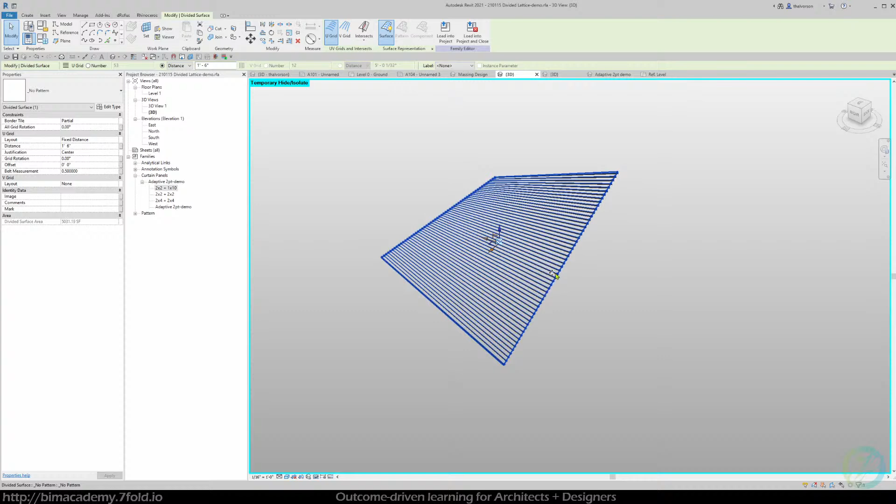That'll take a second to propagate, but you can see here, now I've got framing. And again, you wouldn't have members this long, but if it's a quick concept, you can really get as detailed or conceptual as you want.

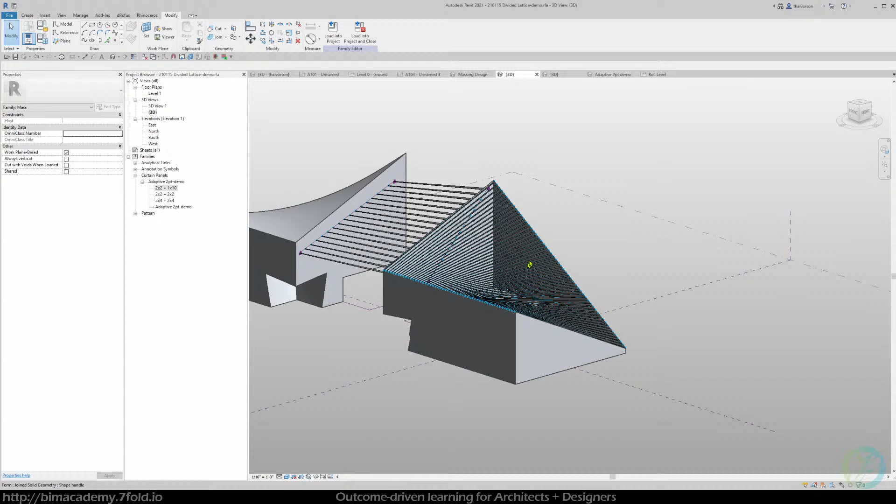Is there any questions? That's kind of the demo I wanted to show you for now. I know this stuff can be a little overwhelming if you've never been exposed to it before.

But what's exciting is it's fully parametric. So I can start to update my base geometry, and everything's going to propagate with no extra work. Pretty darn epic, if you ask me.

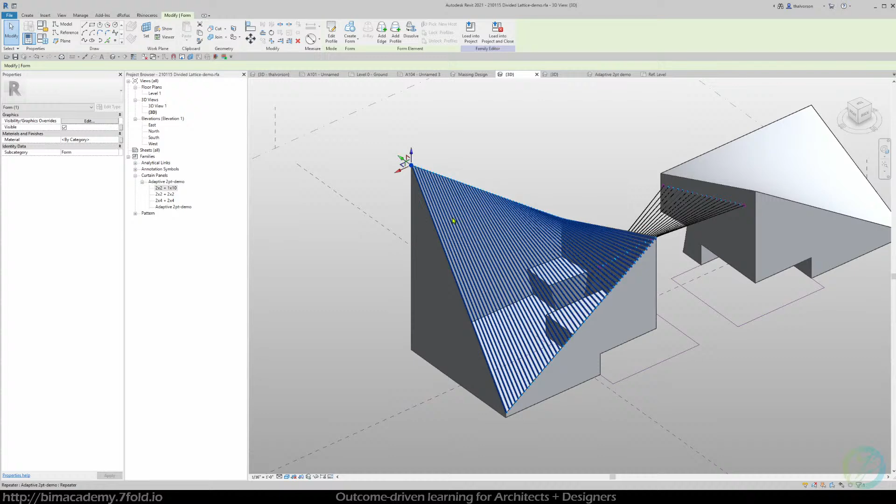And it's important to note too that even though my surface is a doubly curved surface, these are actually straight members. So these structural members are perfectly straight because of how I designed my adaptive component. They're not actually twisting—at least they shouldn't be.

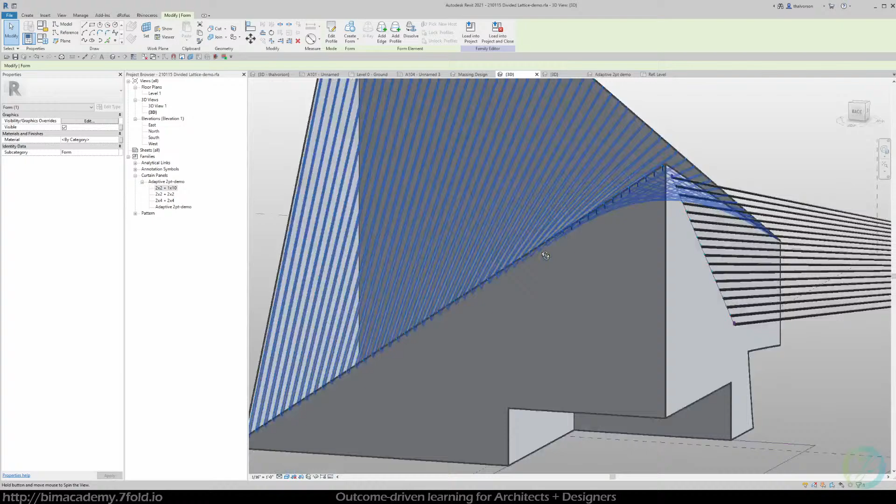They shouldn't be. It looks like it because it's so dense right now, but if I reduce this down to a fixed number again and simplify that, you'd really be able to see that it's just cutting straight across. That's a big differentiator between Revit and Rhino. You might get something similar to this in Rhino, but you'd then have to go through another level of rationalizing it to avoid curves and things like that.

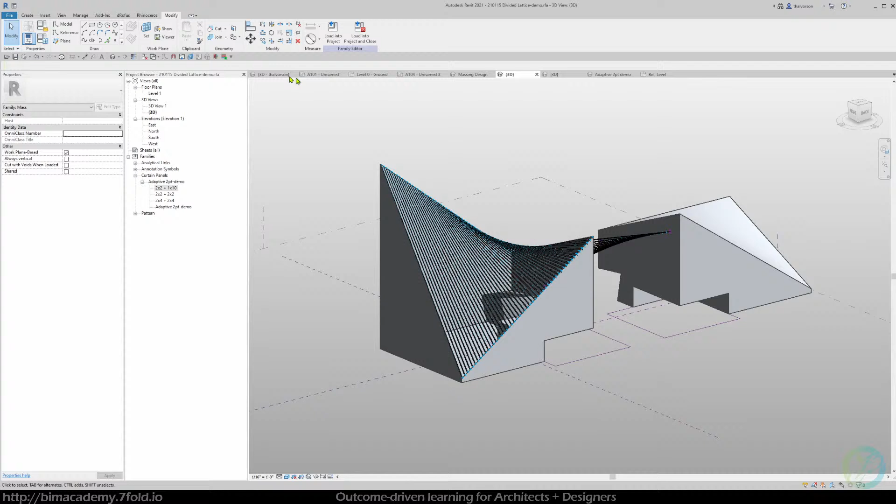All right, I think this is getting a little long. We're going to have to save the Dynamo portion of what I was going to cover for next time. Yeah, it's a whole other thing.

So if we did launch up Dynamo for a second—I know that's what I promised to show you guys, and I changed it last minute. Made an executive decision. Okay, so if you do want to still see the Dynamo workflow, I'm happy to show you. Basically, the main thing I want to get at with this one is using some of the core components to extract data attached to your sheets.

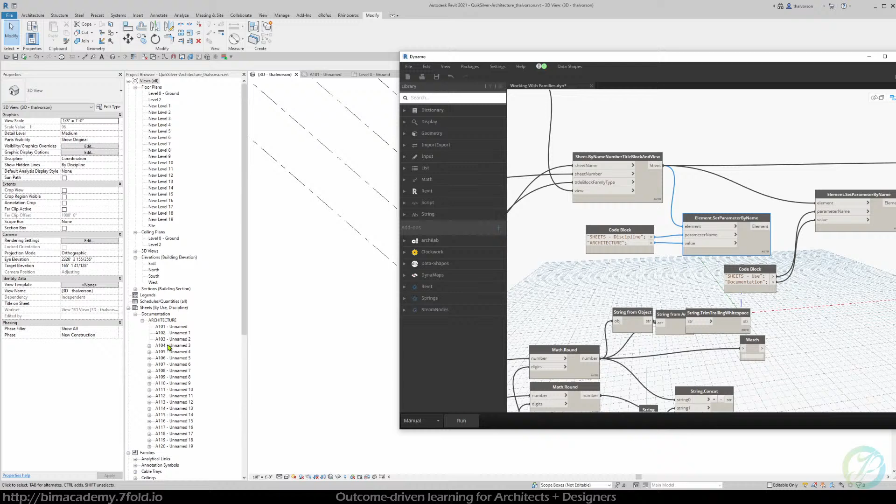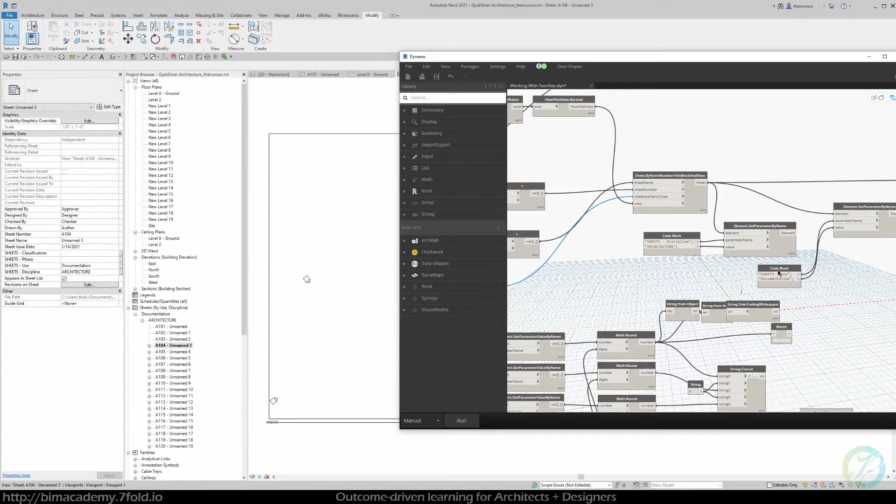So like we talked about, you can automatically set up your sheets and get them all organized, working with the properties here and automating that. It's, I wouldn't say fairly simple, but the core component is ingesting your families and then propagating that to apply, in my case, this documentation parameter value right here, and then architecture. So these two things are my organizational properties, and then I can set those, automating it with Dynamo. The rest of this is just organizing, generating sheets and names and creating new levels if you don't have those. So if you're starting completely from scratch and you need additional levels, this just shows how to generate those. But I think we'll have to save that for another time because the adaptive components just took so long.